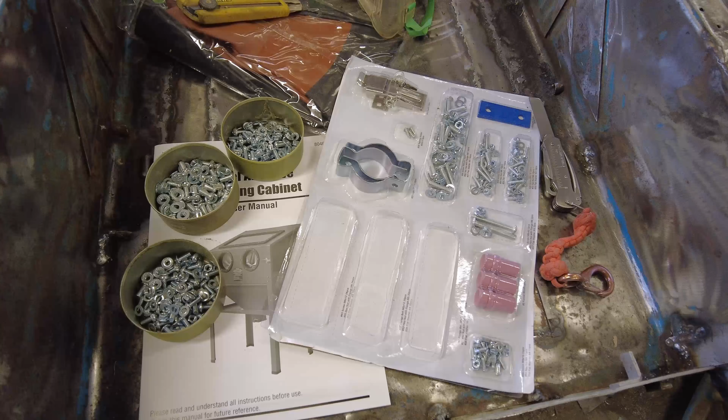Thanks for watching. So first things first, we need to get some organization done here. As you can see, I've got some tins that I've moved some screws out into.

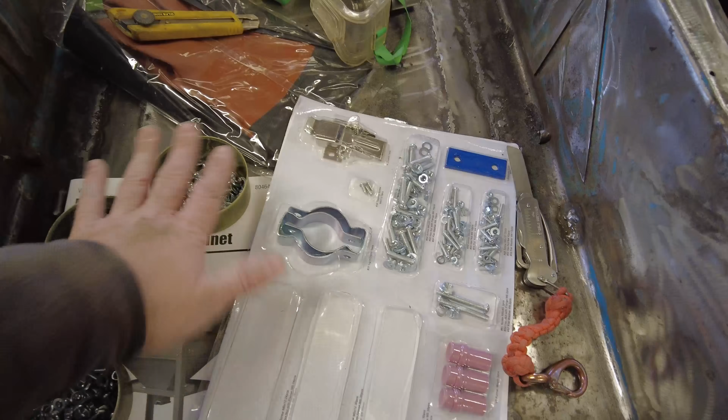The parts come in this blister pack, and you can kind of see the blisters are not lined up with the paper the way they're quite supposed to be. Kind of an indication of the quality of fasteners we're dealing with, I think. Anyways, my plan is to dump the screws out into little well-used tuna tins.

I use these for holding rivets or screws when I'm building airplanes, or screws when I'm building sandblasting cabinets. I'm going to take a utility knife and extract the label that says what each of these parts in the blisters are, and put that little card in the tray so that when I'm reading the instructions and it says use M4 screws, nuts, and washers, I'll be able to easily identify which of the trays that part is coming from. So here we are, we've got them all taken apart, made nice little tags for all of the bins.

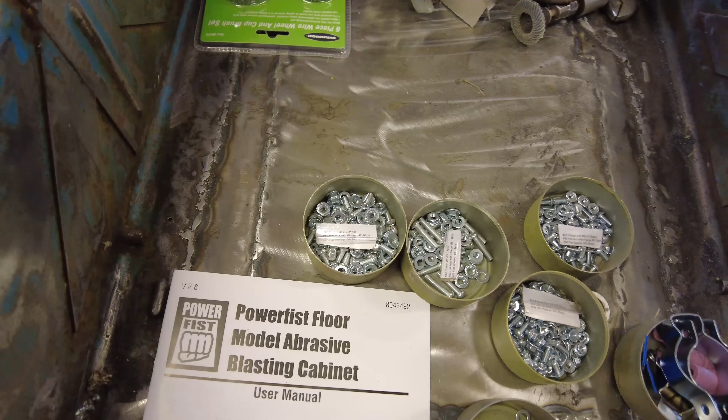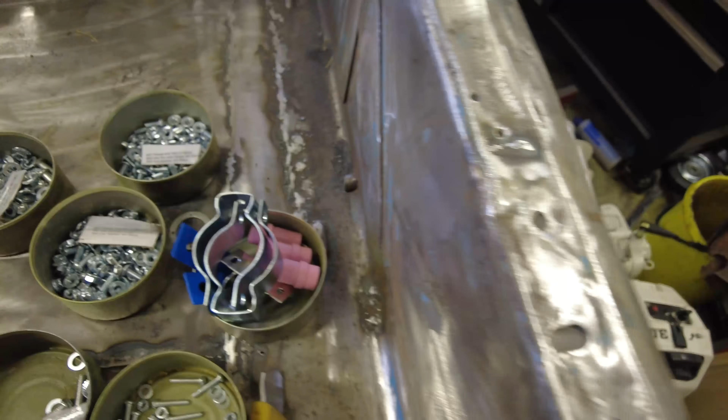Tell me what is in the bin. The only exception is this bin that I have larger parts in. The light clamps are pretty obvious, the sandblasting tips are pretty obvious. All the parts in there should not be any issue identifying them in the manual.

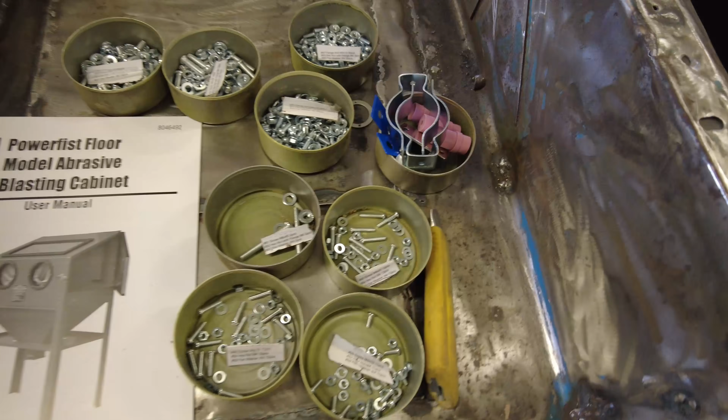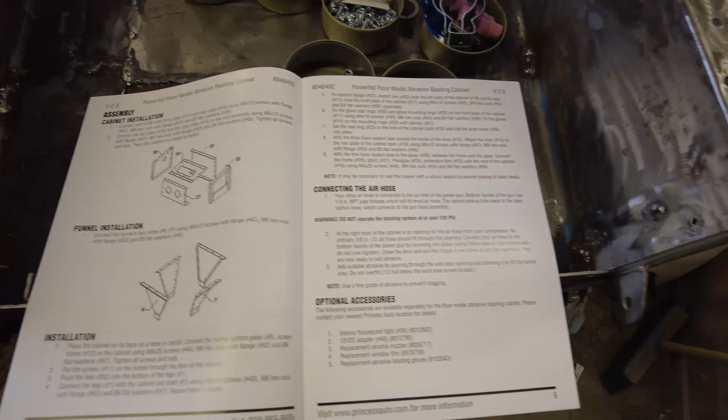So let me start working on step one in the manual and we'll see where we get to. So here are the assembly instructions in the manual. Not what I would call the most user-friendly manual in the world. Basically it's kind of like put the big box together, then put the funnel underneath together.

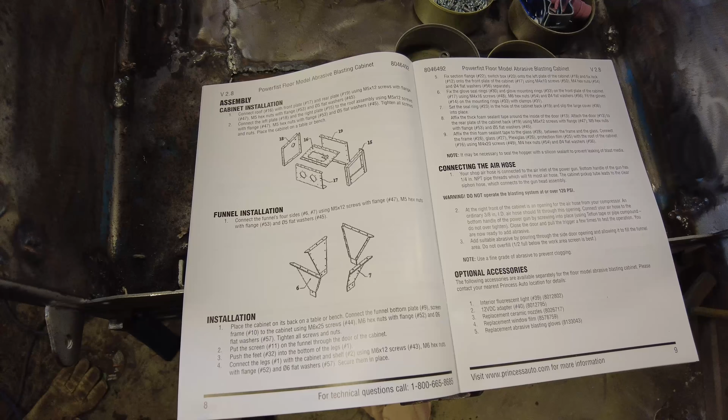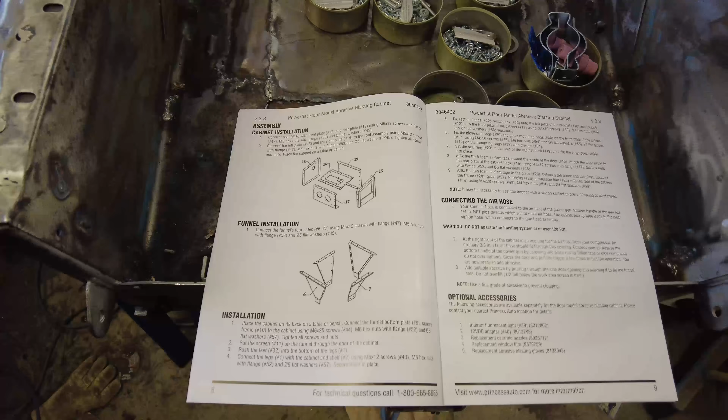One thing that I have seen recommended repeatedly on the YouTube videos about this style of blast cabinet is to use sealant on all of the gaps. I picked up a tube of black caulking that I'm going to use on most of the parts today. However, given that I want to do some modifying to this cabinet in the future, I'm not going to be putting any sealant on these parts until I do the final assembly.

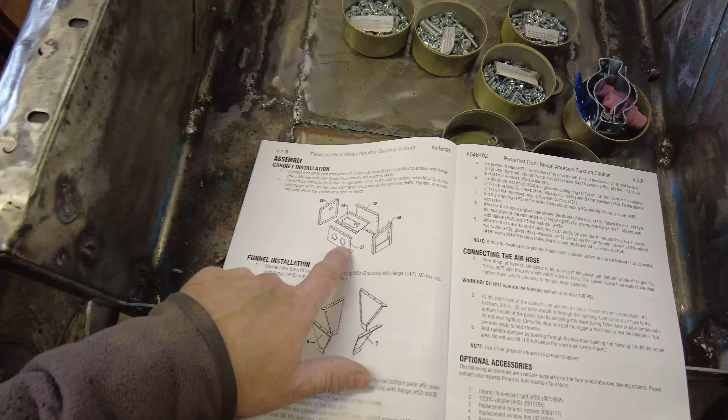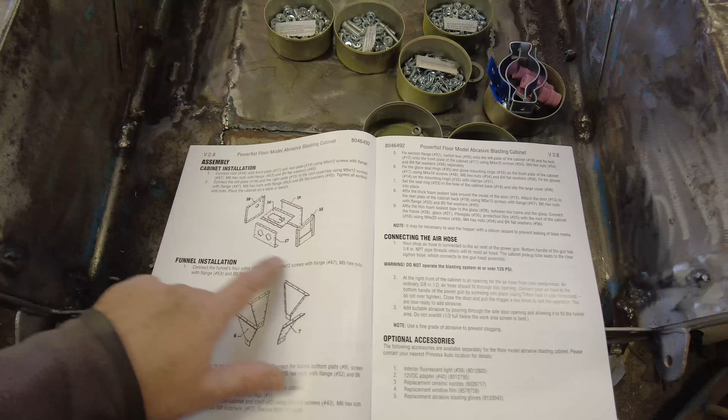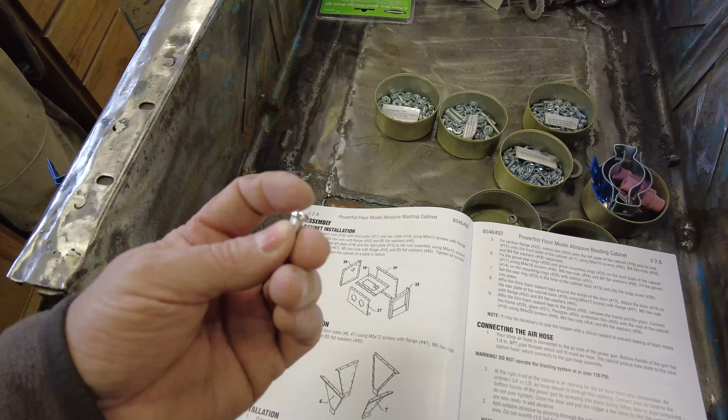The funnel, I don't plan on taking it apart again, so it can go together with the glue at this point. These pieces I'll leave so I can pull apart. One other thing that I've seen recommended is to put the heads of the screws on the inside rather than putting them on the outside, and then having the nut and washer on the inside to catch blast material.

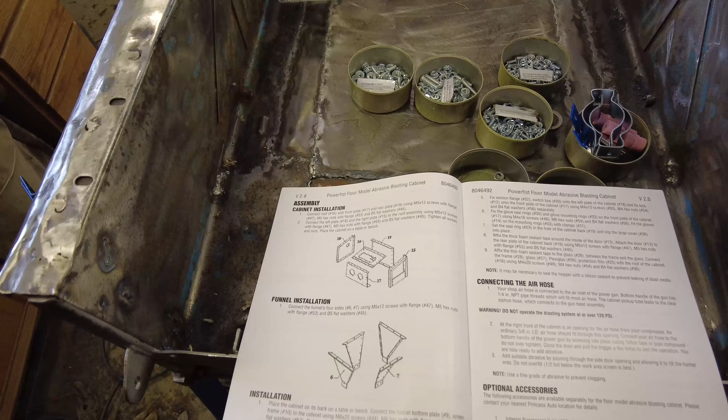I've also seen people recommend taking these screws to the grinder and grinding the head down low profile. I think that's taking it a little bit too far, I'd be happy with just the dome head. So let's start putting some of this stuff together and see how it works out.

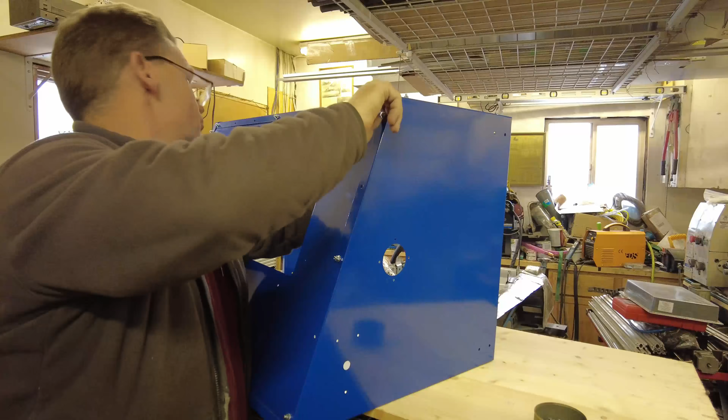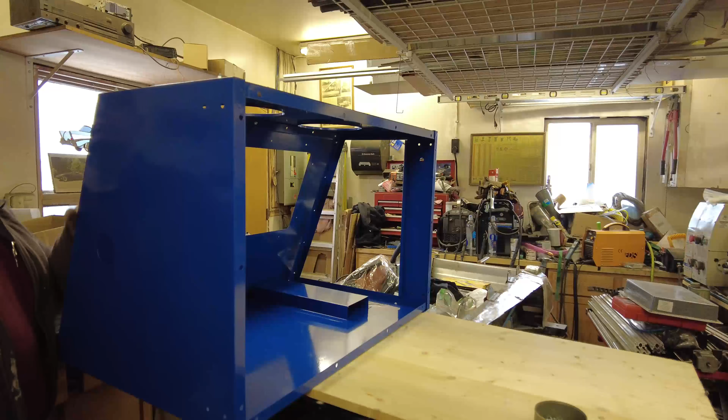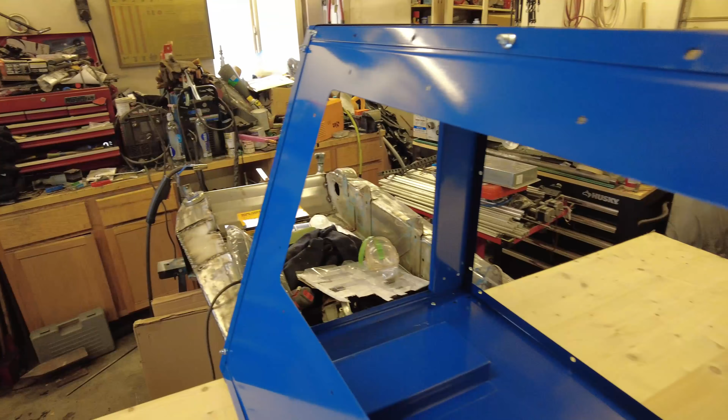So we've got it put together here, and you can see that the ends fit out over the top, as is the back and the front also go over the top. And again, I've just put a few screws in here because I plan on taking this all apart again and sealing it up and adding a few minor modifications to things before I put this into service. But it fits fairly well together.

The finish leaves a little bit to be desired in places. It appears to be either a baked on enamel finish or maybe powder coated. Anyways, for what I paid for it, it'll do.

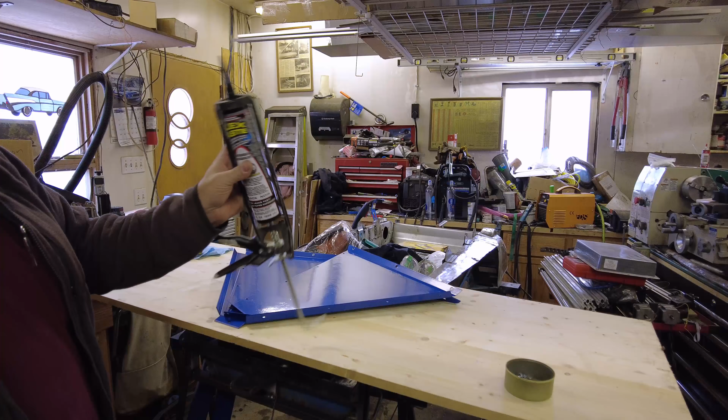So we're going to put the funnel together next. And I've got some, I don't know, rubber black sealant. Hopefully I can put this on without getting it absolutely everywhere.

The side went together, not too bad. Let's just do that all over again.

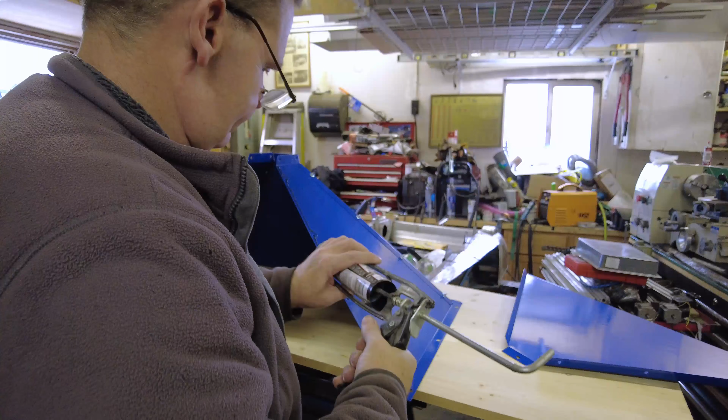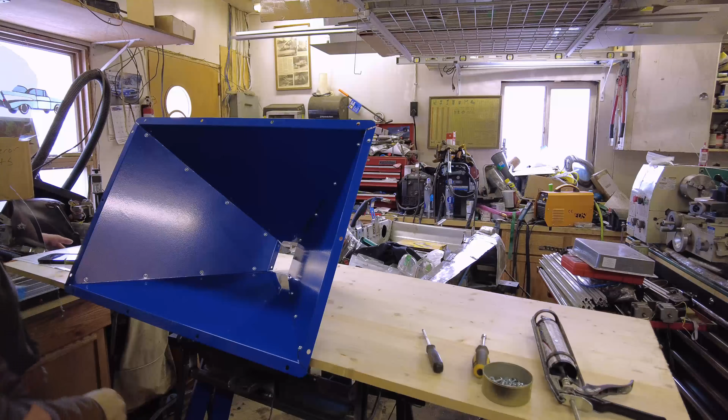We got the hopper built. So looking at the next section, it's almost like the instructions just say to put everything else together. It's not the clearest instructions in the world. They don't have any diagrams, and they don't give a whole lot of information on how this thing is supposed to go together.

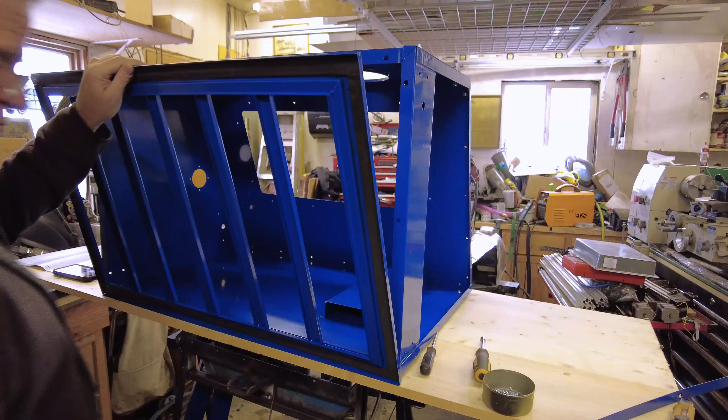Again, we've got this gasket material here that I don't want to rely on. Eventually, I want to have a sealant between the flange and that. Actually, I don't plan on using this. I plan on building another one that fits into the funnel, so you get another 3, 4, 5 inches of usable depth in the unit. It's one of the mods I've seen on other videos.

But for now, we're basically building this thing, for the most part, according to plans. It appears that it's supposed to go together something like that. Then the screen, that the sandblasting gets done on, is supposed to sit on these bars. M6 screws, washers, etc., out of this bin. Unfortunately, there's no holes in the gasket material. There's gasket material on both sides, so we'll have to go along and find the holes, punch the screwdriver through.

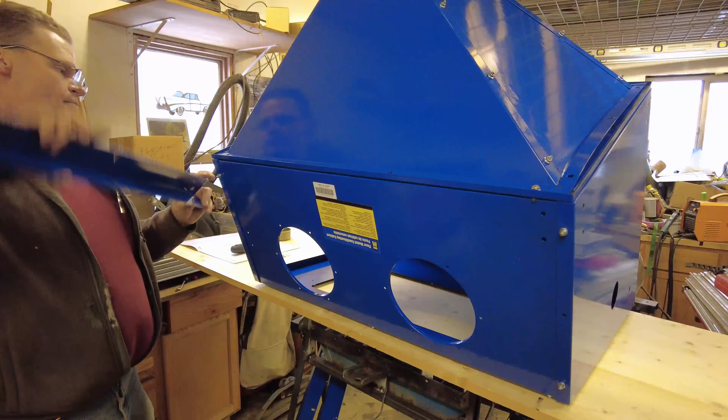Well, there, that kind of sort of gives us the front legs. Now we've got to figure out how to reach in and do the backs.

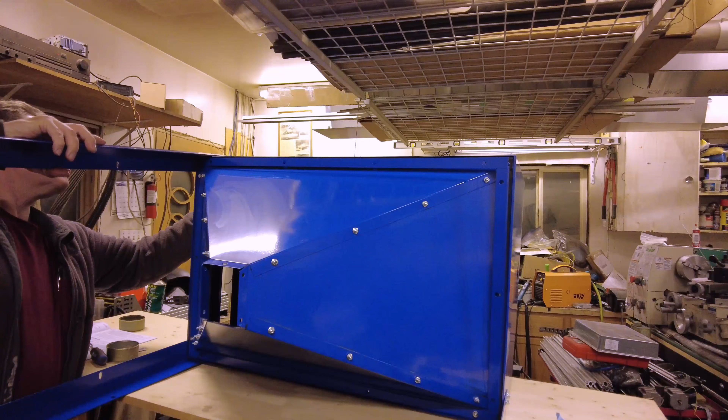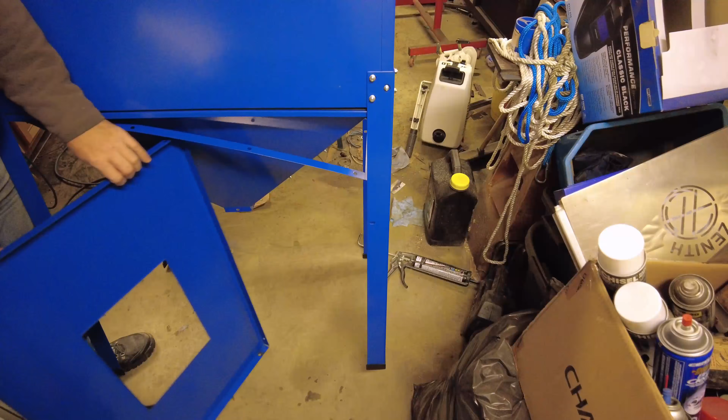So I think I see where I made a mistake. I was thinking those bolts that were holding the hopper into the bottom of the unit were kind of on the short side. And I was right. That's the bolt I should have been using. It's almost twice the length. That will make things much easier for bolting the hopper in. Again, I don't plan on keeping it long term, but it's a good place to start.

And what told me that I was using the wrong hardware was that the amount of hardware for attaching the shelf to the legs was of the appropriate length. So therefore, we must have other hardware someplace else. And I found the longer screws. Again, the instructions for this are not great. You kind of gotta make it up as you go along.

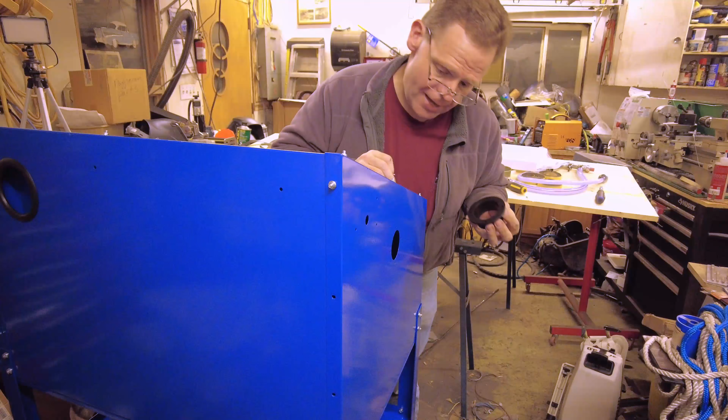So now I got the basic cabinet put together. Again, I haven't put the screws in all of it because I plan on taking it apart again and sealing it up and making a few minor modifications. But we'll put some of the accessory bits and pieces on here.

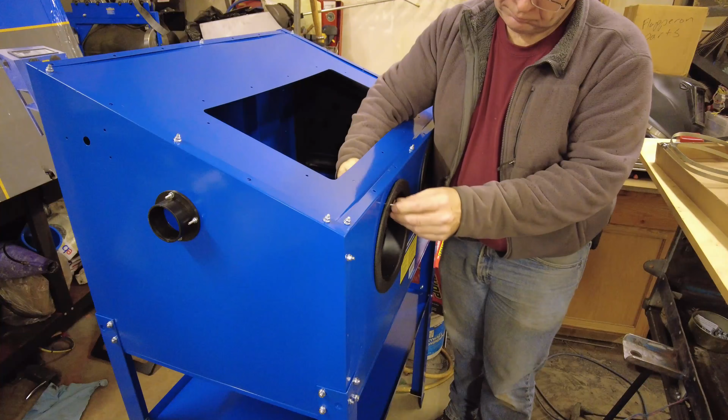These are supposed to have a gasket on them, although that's not much of a gasket.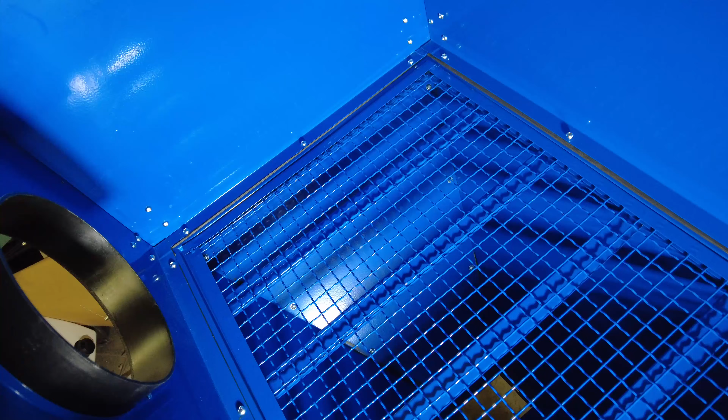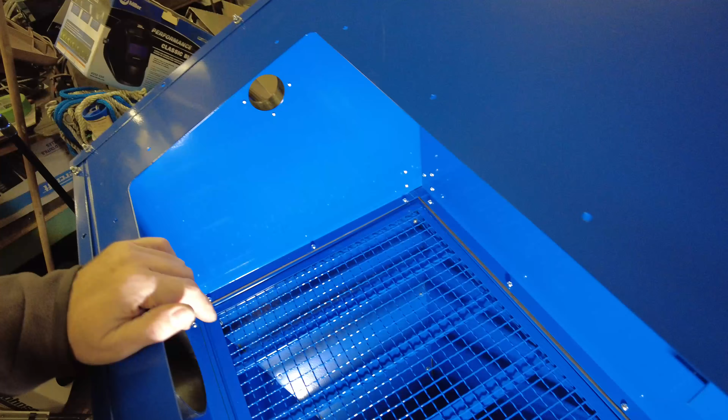So here we are. We basically got it put together roughly. I haven't put sealing in any of these joints. That'll have to be taken apart and sealed. Let's see if the camera will point in the right direction. Up here I haven't got any bolts.

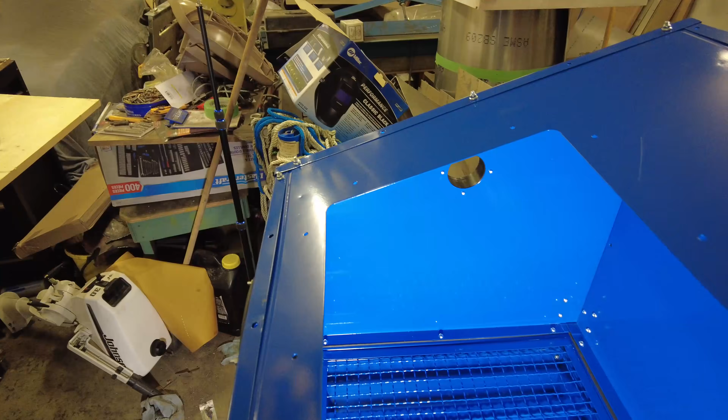The glass goes on here. The glass is some kind of tempered glass with an acrylic sheet to protect it. So you can see the inside of the cabinet looks fairly decent. You know, it is what it is. It's built to a price point. You get what you pay for.

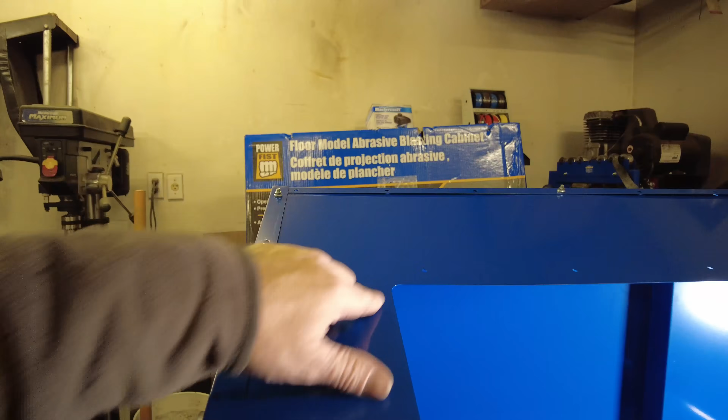Something tells me I got to change these screws out. The longer screws are for the glass, and they are designed to have nuts on the back side of them. That makes changing out the glass kind of a challenge. You got to reach in all the way from the door to this point to get at these nuts.

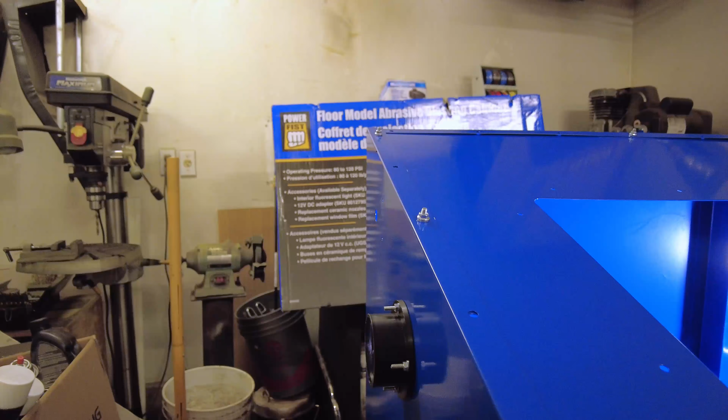So one of the recommendations I've seen in a video was installing riv nuts. Installing riv nuts in these holes takes care of the need to get in behind with a wrench or pair of pliers to take the lens or the cover off to get at the glass. One other mod I plan on doing is putting a deflector over top of this outlet so it draws air from down below instead of sucking dust. I'm going to set up a vacuum cleaner that comes off of here through a cyclonic filter that will collect the crap down in a 5-gallon pail.

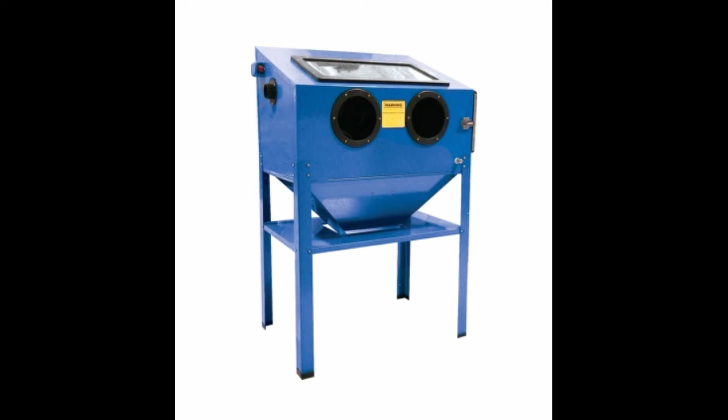So this is what the cabinet's supposed to look like when it's done. Obviously I have a few more steps to go before mine looks like this. However, wanting to do some modifications, I didn't want to get too carried away assembling and then disassembling the cabinet to do what I want to do with it. So check back in a few weeks. Hopefully I'll have some more videos up by then on how I modify this cabinet to make it more functional.